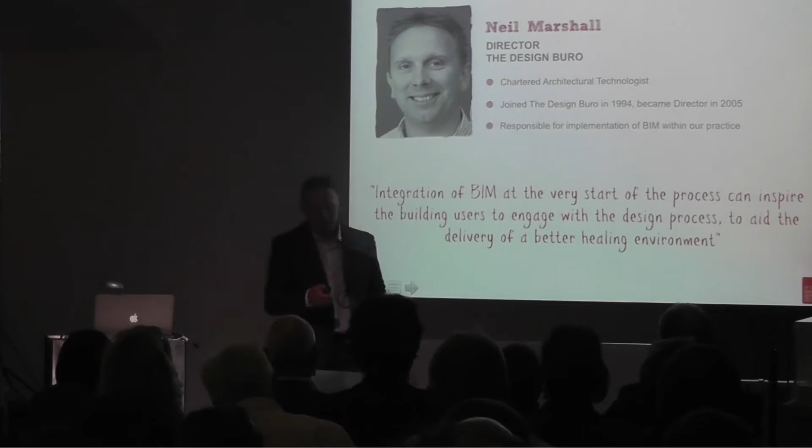So just a quick few pictures about Design Buro, just so you can understand how we've grown over the years. In 1991, there were 7 of us, myself, my wife, who sat down there. As we've grown in size over the years, we've got up to about 40 people, and the other one on the right-hand side is a current picture.

So we've been committed to Vectorworks, Minicad, from the outset. I've been a user of Vectorworks for 20 years now. And the reason we've stuck with Vectorworks over that time is that it's given us the freedom to deliver the buildings that we wanted to deliver. We've also been challenged on a number of occasions by some of the bigger players in the UK. But I can say from my heart that Vectorworks has always delivered for us and delivered the buildings. We've always met the challenges that have been presented to us.

So the philosophy at Design Buro, in terms of architecture, is about the accessibility of our clients - healthcare is our main market. It's about engaging with the users of the buildings from the outset, involving them in the process and giving them choice, planning with them the new facilities that they're commissioning from us, because ultimately at the end of the day, they are the client, they're paying the budget. So that is the ethos at Design Buro.

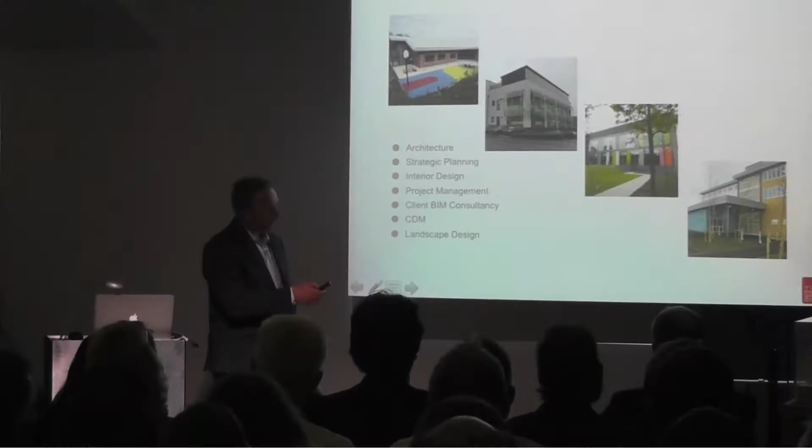So now we're getting to start talking about BIM. It was in 2008 when I first came across the subject, and I was building a community hospital for a large Tier 1 contractor, Laing O'Rourke, in the UK. And at that time, we thought that Laing O'Rourke would be asking for all projects to be done in BIM by 2010. It turned out that wasn't the case.

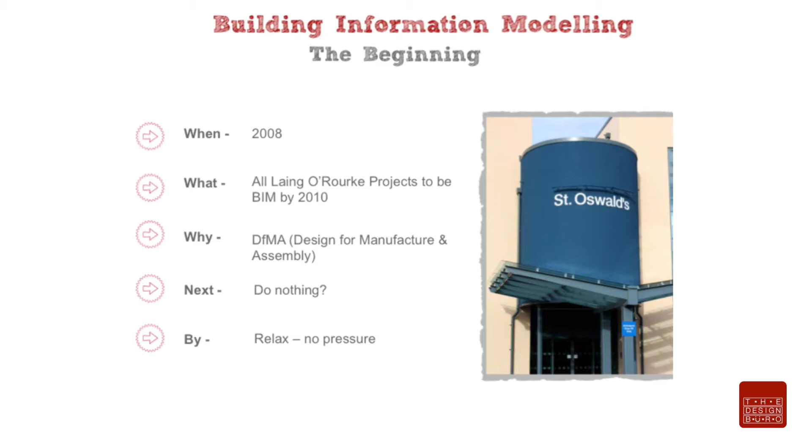We also didn't really understand BIM at that time, and Laing O'Rourke's perception was that it was design for manufacture. So they would obtain the information for their off-site manufacturing from our models.

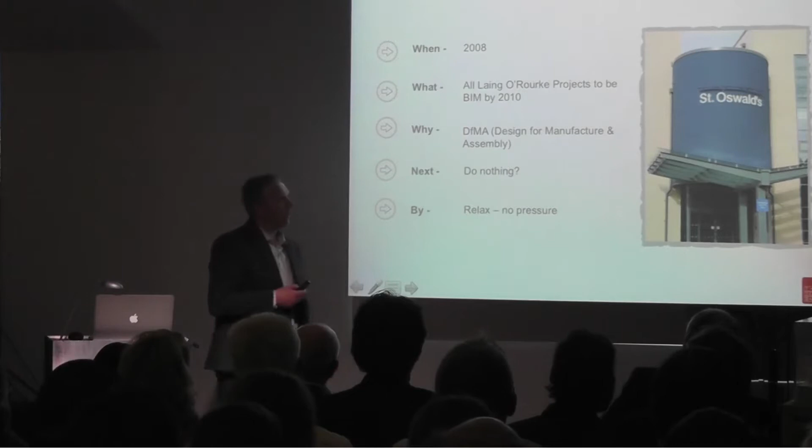Did we do anything from that point on? We didn't. We sat back for a couple of years, and there was no further momentum.

After a couple of years, we started to get more involved in BIM again, and the conversations were happening more frequently in design team meetings. So we thought it was about time we actually sat down, did some reading, and tried to understand it. I can assure you at the beginning there was so much information available to us. It was overwhelming. We didn't know which way to go, and we didn't know what to do.

We did know at this point, however, that the government was mandating BIM on all centrally procured projects by 2016. So we knew there was a deadline, and we had some initial frustrations.

The next thing that happened is we secured a project with Laing O'Rourke to build a pathology building in Glan Clwyd in Wales. On this project, Laing O'Rourke gave us the opportunity to use BIM. They also stipulated that we could fall back to 2D if we needed to. So that was a bit of a lifeline for us on that project.

We decided to jump at the chance because we felt this would be a fantastic education. And looking back now, I realise it was a great education. To actually have deadlines and to actually have something to deliver gave us an immense focus. Since then, we've looked at other areas of BIM and we've trialled various things. But without a deadline, it's very hard to actually have that momentum. So we were lucky in that respect.

We were also lucky that the structural engineer, the mechanical and electrical engineers, and the contractor all bought into the process. So we weren't doing this as architects in isolation, saying look at our great models, look how fantastic we are. Everybody around the design team wanted to be involved. And I think that is another key point - you have to want to, you have to be involved. Anybody who is less passionate will struggle. You need a passion to push forward.

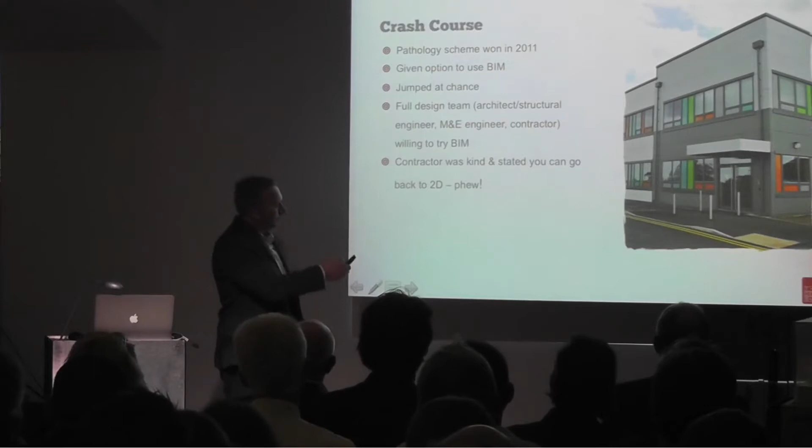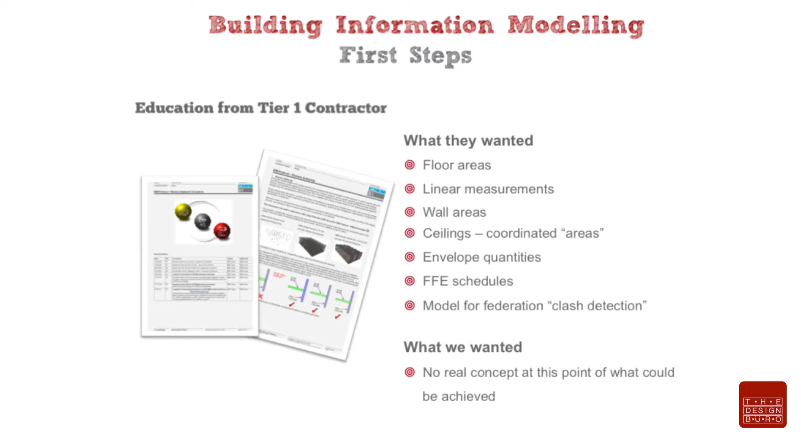One of the first things we did with Laing O'Rourke was go to their offices in Manchester. Myself and a colleague went there for a whole day, and we sat with their BIM manager at that time, who talked us through all of the protocols and standards that Laing O'Rourke use. It was a tough day, but very educational.

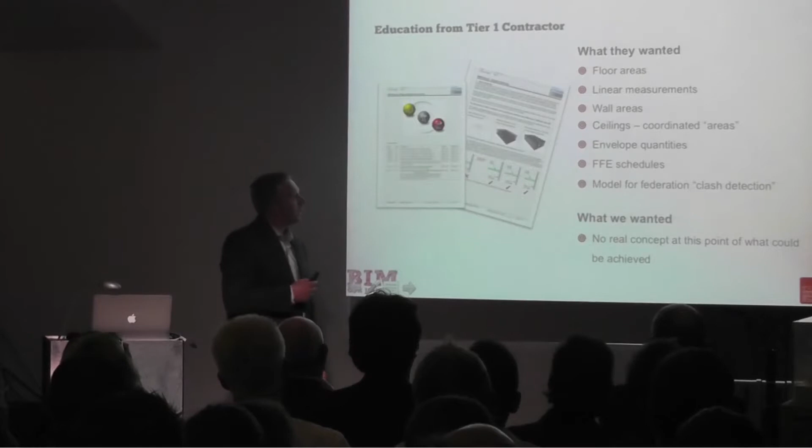We benefited a huge amount from such a large contractor giving a small to medium enterprise that opportunity. We came away from that meeting knowing what they wanted from our model: floor areas, linear measurements, wall areas, ceilings, envelope quantities, FF&E schedules, and a model for clash detection.

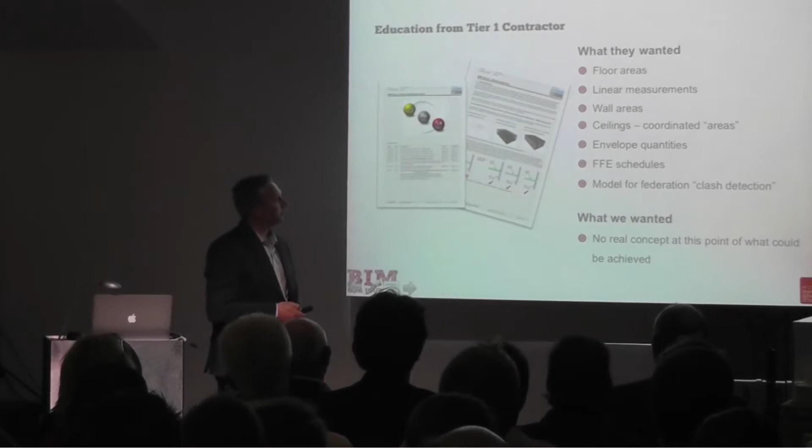We didn't know what we wanted as architects from the model at that point, we only knew what the contractor wanted. We were slightly concerned that we'd signed up to deliver all of that information from BIM. However, they had given us the lifeline that we could drop back.

So we initially set up some training with our equivalent supplier in the UK, which is Computers Unlimited. We upgraded to the architect version because we needed it to deliver the model.

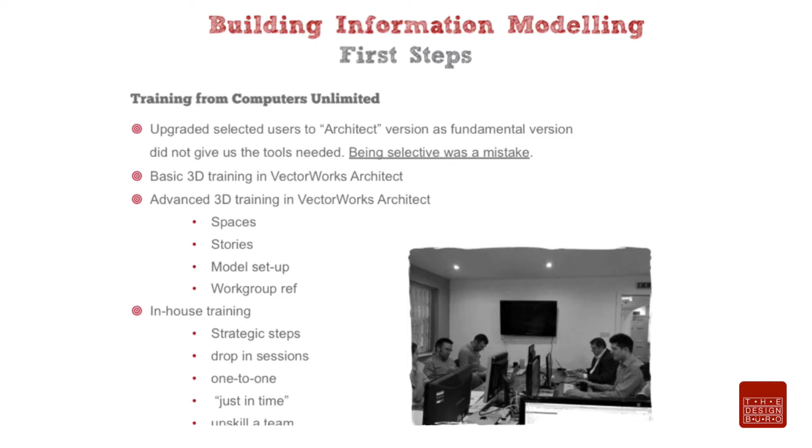Initially we selected a team of people to upgrade their software. We had 29 Vectorworks licenses, and our first batch we upgraded about 10. I think that was a mistake, but I understand why we made it, and we were hesitant in terms of the financial commitment.

But when we started to see what we could get back from those models, and from drawing in a 3D environment, we found the process extremely economical, and it paid for itself very quickly. So that would be the one piece of advice I would pass on.

We had the basic 3D training in Vectorworks Architect with Computers Unlimited, and that was just 3D training, not BIM - how to use the 3D tools in Vectorworks. We learned how to use the spaces, the stories, how to set a model up, and how to work group reference. Really quite basic things at the start, but a foundation to move forward.

We then identified within the practice that we needed an in-house champion, a BIM manager, and we set about looking for individuals who'd shown a keen interest and who could deliver on those roles.

We then sat down, myself and my colleague who we promoted to BIM manager, and put together a document which we called our strategic steps. We drew a simple staircase, identifying each step of what you needed to know in terms of your progression.

We then divided that into columns, identifying the key people who needed to know about 3D modeling, who needed to know about BIM, and later who needed to know about the data, and what the management structure needed to understand in terms of BIM - because they don't need to know how to draw a wall in 3D, but the management structure needs to understand BIM.

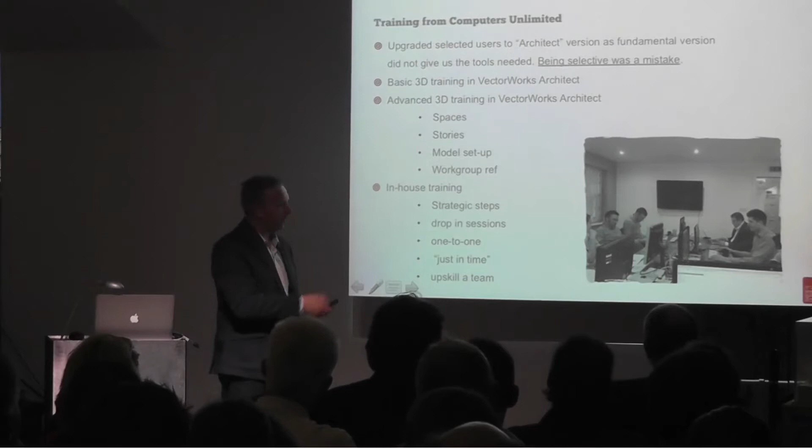So then we got into the actual delivery of our Glan Clwyd project. Of course, we were hesitant about diving straight into 3D. So we were fortunate enough to set up a 2D stream of people, and we had a 3D team as well.

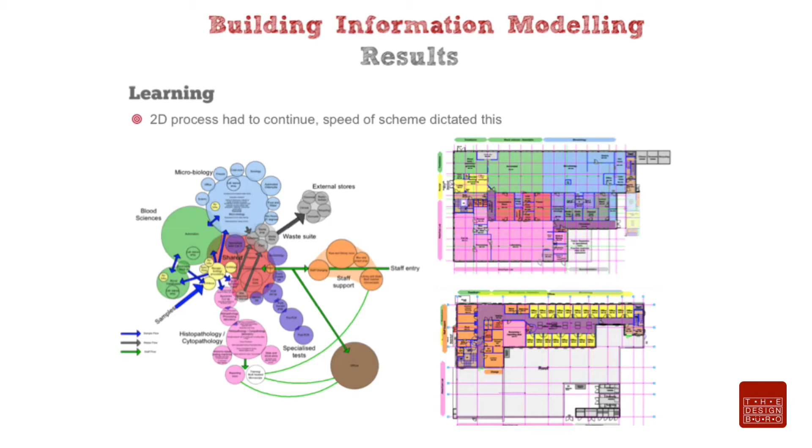These are the two-dimensional drawings initially produced for the space planning, room arrangements and adjacencies - the two-dimensional plans we took into user group meetings to get the original sign-off to the schemes. These are at a 1 to 200 level, relatively early stuff.

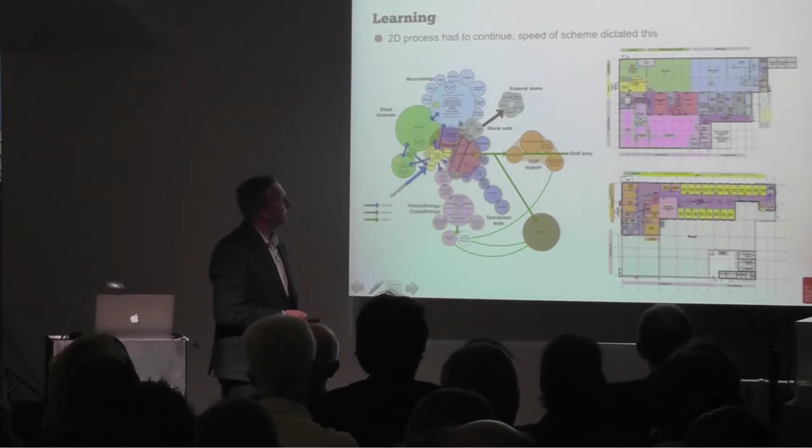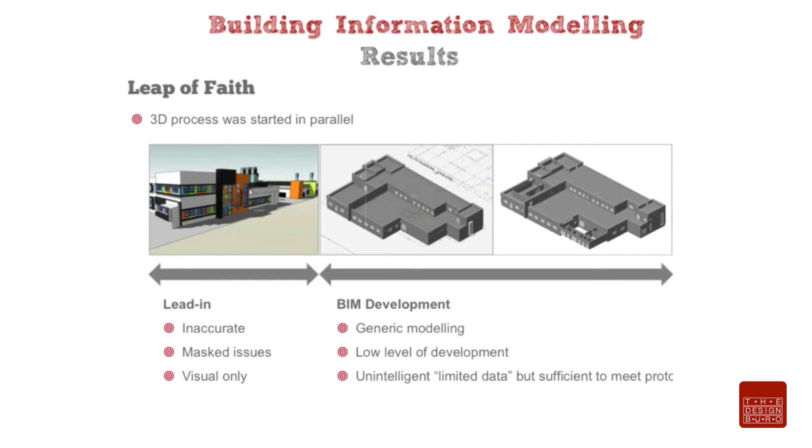Meanwhile, the 3D team was drawing the building in 3D based on the initial strategic arrangement diagrams. The first few models were inaccurate, they masked the issues, and were purely for visual purposes only. But we were starting to get some relatively decent stuff out of the model. We soon understood that the 3D team was overtaking the two-dimensional team in terms of the outputs.

And then we were able to take better drawings to our client meetings and the clinical users. We could show them the clinical rooms in 3D. We got better buy-in from the users, and we got quicker sign-offs. So it was at this point that we realized that the 2D team was struggling

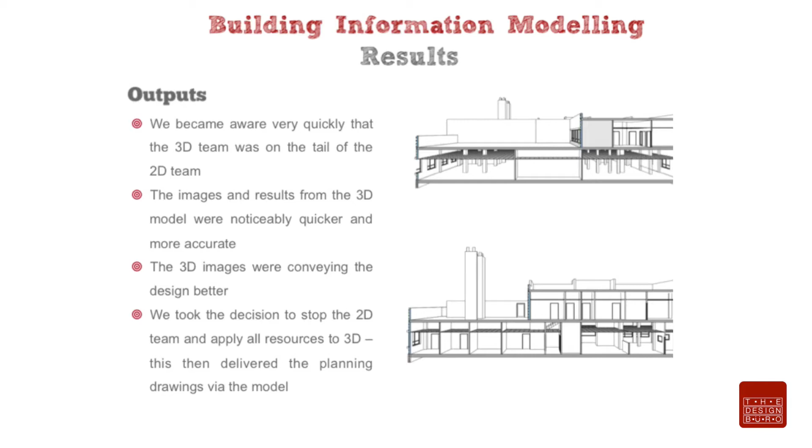to deliver any useful information that we could take to those meetings. So we moved the 2D team into helping the 3D team, and ultimately just jumped in feet first and decided that from that point there was no going back.

So we delivered the planning drawings and the 1 to 200 sign-off information all from the model that we had created, and we did that within the space of about 4 weeks.

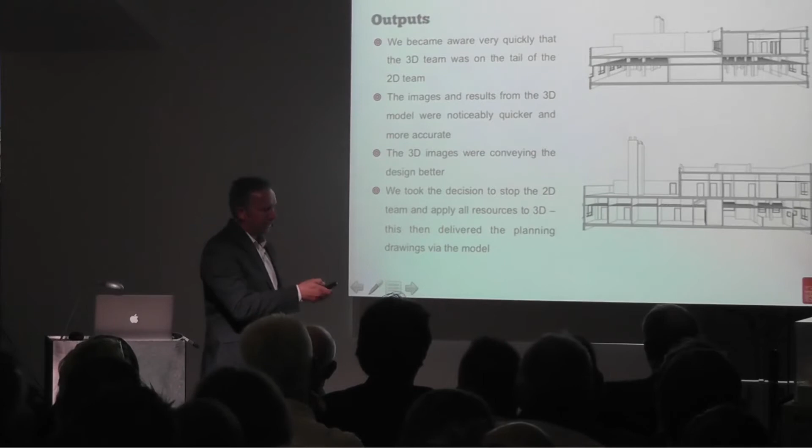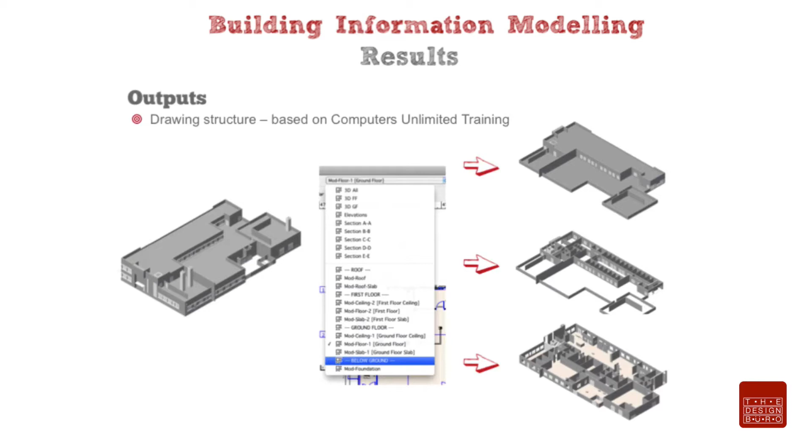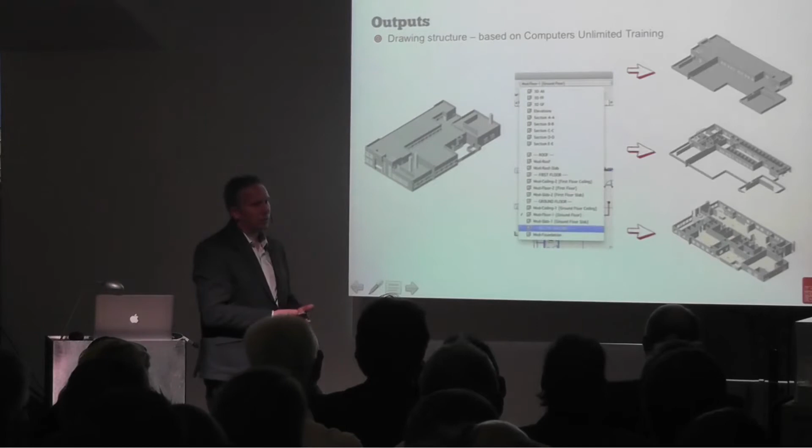We learnt at Computers Unlimited the basic model structure, and we use that for all of our models now, and that sits within our BIM protocol in the practice. That information is relatively available through various websites, but the structure that we learnt at Computers Unlimited was a good foundation, and ultimately we had to convert our 2D workflows into a 3D setup, so our layer structure changed, our sheet structure changed, and our classing structure changed.

We also learnt from this process that we had to have a library of resources. Our 2D workflow never really had a library of components or a library of information to call upon. We just generally drew it from scratch each time. But we understood the benefits of the reuse of this information through the model.

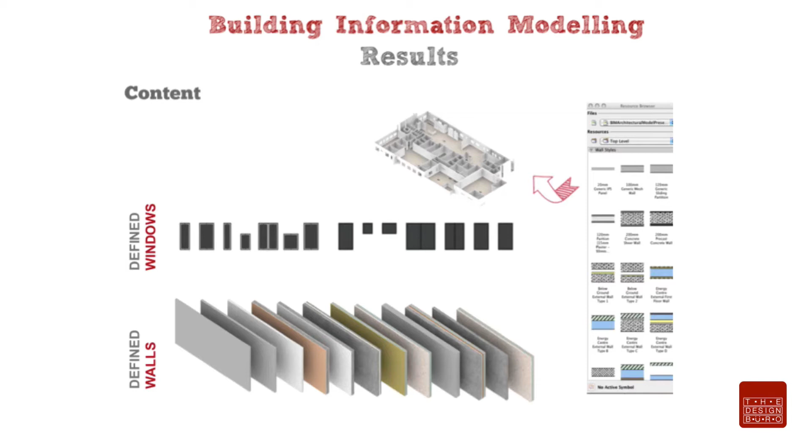So we had a couple of individuals within the practice sit down and go through every wall type, every floor type, every ceiling type they could conceivably think of. We structured that information within our Vectorworks environment, and then we used that to deliver the construction drawings for the project. And ultimately, we did the same for windows, doors, furniture, and so forth.

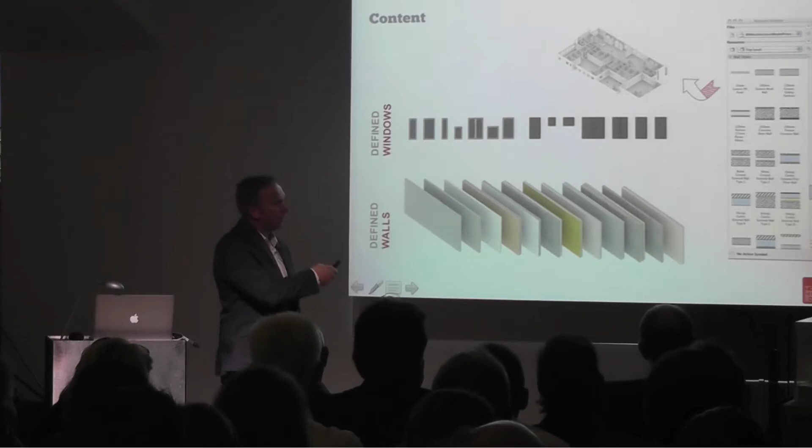That then gave us the schedules and the information that Laing O'Rourke was asking for at the outset through their BIM protocol.

So a little bit more information about why we've continued with BIM. As I mentioned earlier, the government mandate is to deliver all government procured buildings in BIM by 2016. We are in some way lucky that the government has been really prominent in terms of what they've put together for BIM with their task groups, with their website, with the documentation that they've put together.

It's been a huge help in terms of convincing the clients and the smaller contractors that we work with that there's a real necessary need to move forward with BIM.

You can download this information from the UK websites. There are 4 Pathfinder projects that have got a huge amount of data and information on there that demonstrates the advantages of using BIM through a project workflow and the life cycle of the building.

I've mentioned the government's documents, and there are 7 documents that the government have put together that identify what's needed within the model and within the BIM protocols to deliver that information. They've also set up a series of regional hubs, of which I'm a core member of the West Midlands Regional Hub, where we meet once every 3 months, have a cup of coffee or tea, and basically talk about the problems and share information.

Some of the reasons the government have done this is that they've looked forward in the UK to 2025, and they've delivered a government strategic objective document. In that document, it talks about BIM in about 3 places. It doesn't feature massively in the document, but it's the clear driver for delivery of BIM in the UK.

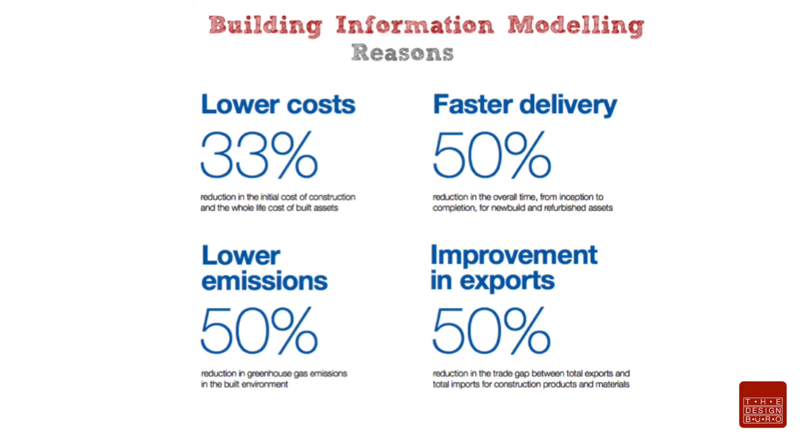Another factor the government has looked for is export. The government wants to export our BIM knowledge and talent to the rest of the world, so they've seen a business objective there. By upskilling their workforce, they think they can go out to the rest of the world and sell that. We are starting to see that now with some of the larger contractors winning more work abroad, and they could attribute it to BIM.

I've talked about the 2025 vision. You can download that from the government website. It's a good read, it tells you the reasons behind it and talks about lots of factors involved, and it comes back to cooperation, coordination, people, and leadership.

They talk about the integrated project delivery cycle in the PAS 1192 documents, the naming structures, the naming conventions, the digital plan of work - how much information should be in your digital model at what stage of your project life cycle. It's clear, it's prescriptive, and we should all be working to this in the UK. So it doesn't matter whether you're M&E, architecture, contractor, or who you work for, it's a common source of information.

A couple of things still outstanding are Uniclass, which is the classification of construction components. That's currently gone out to tender for delivery from one of the major BRE or the NBS in the UK.

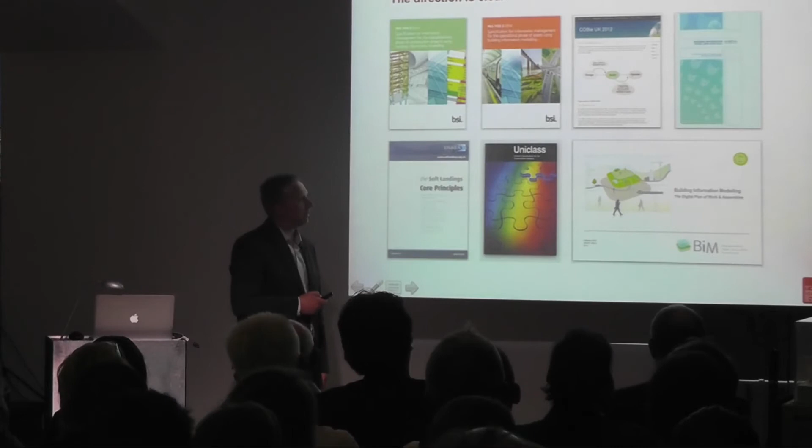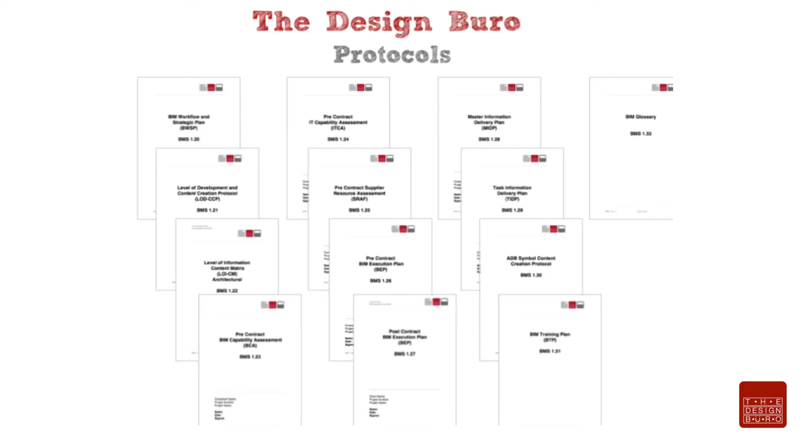So what we did at Design Buro is we sat back from this. We looked at our current business management system, our current protocols in terms of Vectorworks, and we thought, what do we need to do to make our business ready for 2016? That culminated in the production of all of these documents, which are all versions of a government document - they either come from something in BS 1192 or PAS 1192. But it sets a structure up for the employees within our practice to understand how this information is put together and to document what they do.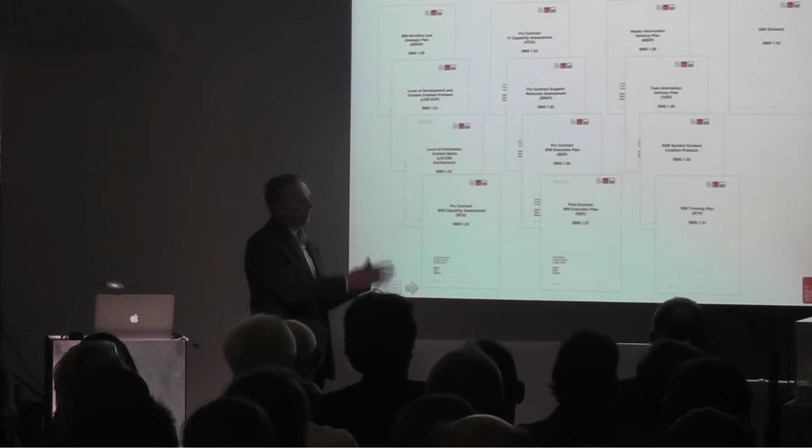Because along with BIM, you need all the paper documentation. You need to agree with the team what you're going to produce and when you're going to produce it, and you need to honour your promises. So this suite of documents sets out at the outset what, when, why, and how.

So if we go back to BIM now, we've talked about our strategic steps, drop-in sessions, one-to-one training, and just-in-time training. One of the things I learned by going through that process is the training can take many forms, and you can't just train people with one method - everybody learns in a different way. Our practice has technologists, interior designers, managers, job winners, architectural assistants, and they all have different needs, so it's about tailoring that information to suit the individual.

So we go back to pathology now, and we've got the information that we ended up with at 2D. We've got our 3D basic model, which gives our client a better understanding of the building in three-dimensional form. Our client being the NHS, we deal with the clinicians, and they're on the front line - they deal with people that are poorly. They don't understand drawings, but they understand 3D drawings, so that gets better buy-in.

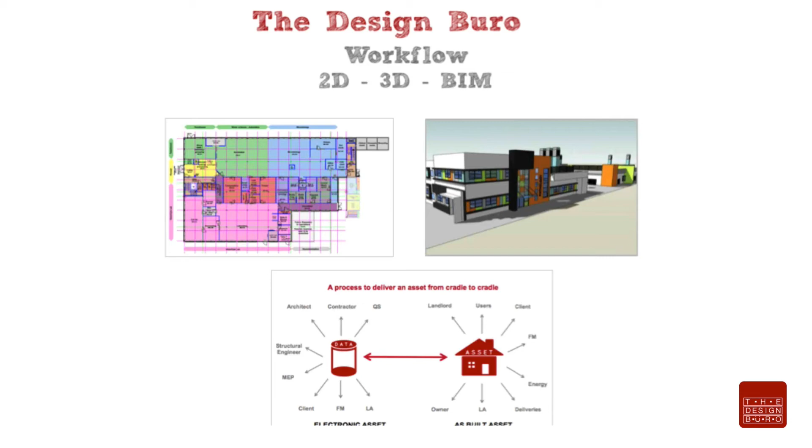So a small diagram at the bottom there to try and understand what we're trying to do and how we're trying to promote it. We've got an electronic asset and we've got an as-built asset. Those two items need to communicate with one another to make sure that we deliver this life cycle information for the building.

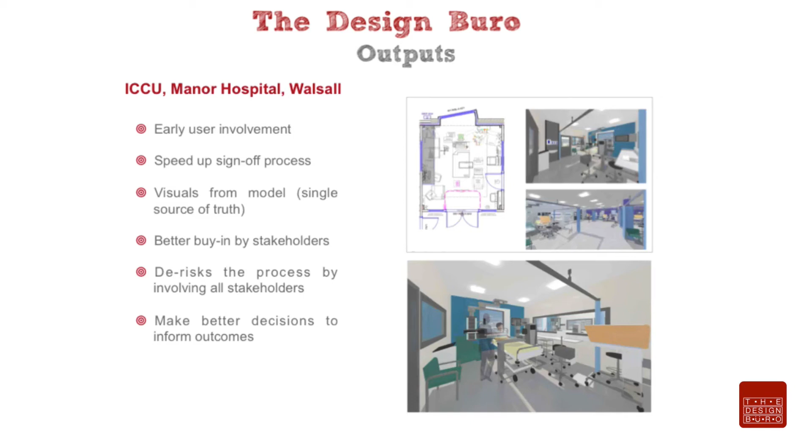So here's a couple of other slides on the advantages that we get from BIM and some of the drawings that we can take into our user meetings. We can get this information quite quickly now we've got our library of components. So earlier user involvement, at 1 to 200 level or at room data sheet level, we can take in a relatively quick model that we can produce to the clinicians and show them what their room is going to look like. We can take our laptops and projectors and modify these in that meeting, should we choose to.

Live demonstrations are always scary, but the opportunity is there to do this in a live environment.

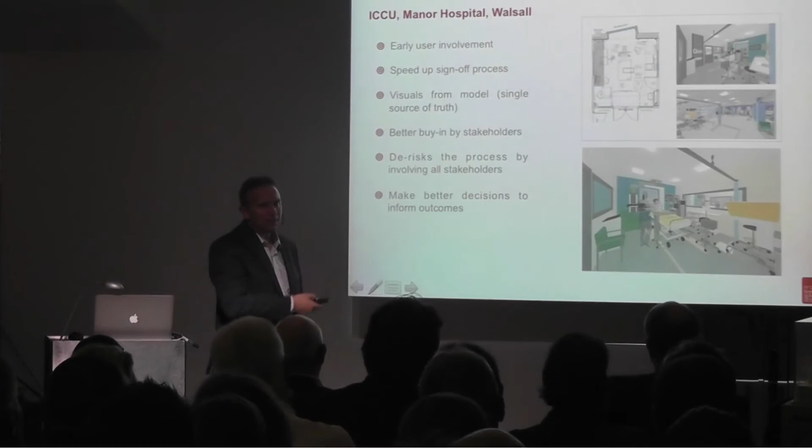So we speed up the design process, we get better visuals, we get better buy-in from the stakeholders, so people are less likely to change their mind if they've seen this. If, for example, we give the clinician a two-dimensional plan, they might be embarrassed to say they don't understand it and sign it off. But we know that if they find something wrong later on, we'll be expected to change it. And there's a history of that happening within how we've delivered buildings in 2D. If we show them the 3D visuals, they understand it and they're more happy to engage with you on a level that they understand as a clinician and you understand as an architect or a technologist. So hopefully it makes better decisions. We get better buildings, we get better hospitals and better healing environments.

So this is a project that I completed in around about May. We had handover in May. From this model we had all of our schedules, all of our three-dimensional views, and we had our user engagement. And for me, one of the key strap lines for BIM is a single source of truth. In the past, the contractor will cherry pick which document they want to use. If you have 3 documents and they're all different, they'll cherry pick the cheapest document. And so at least with BIM, if it's wrong, it's wrong in every document. There's no opportunity for them to decide which document they want to pick or which one they want to say they priced. You've got a clear fact. It's a single source of truth. So that eliminates some of those discussions that have gone on in the past.

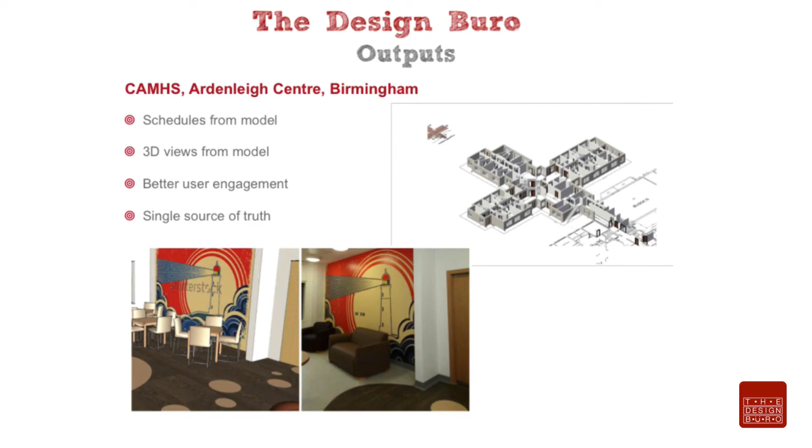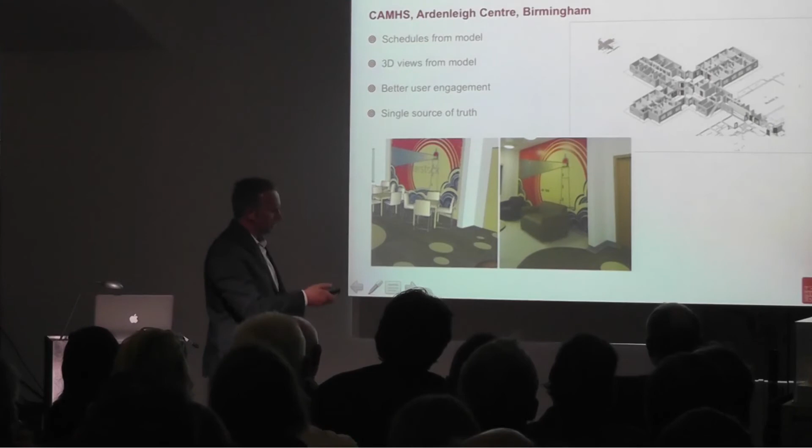And the bottom 2 pictures there are the virtual picture that we used to explain to the client what they were getting. And these were children. This is a CAMHS unit, so this is for children with mental health problems that have done some really horrible things. They were part of the user engagement. They used the process of building this building to help them heal. So we sat down with these individuals who were challenging, and we went through various different options with them, and ultimately what we delivered electronically is on the left, and what we delivered on the right there is the actual constructed building. I think that's a great way of demonstrating client buy-in.

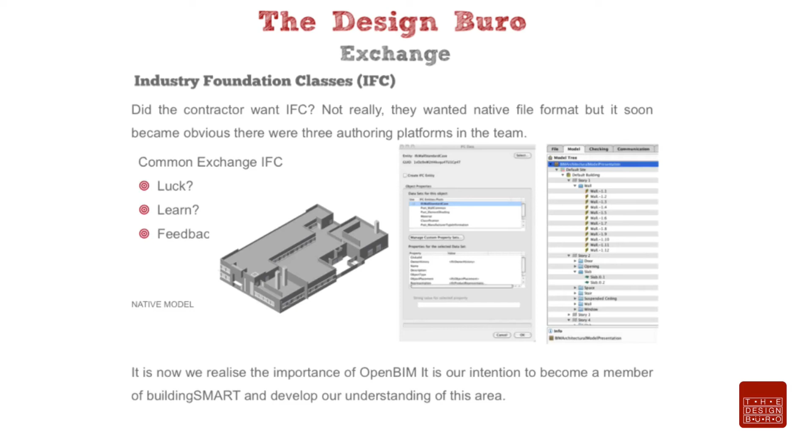So in terms of the model then and exchanging the model, we've been challenged in the UK by the main contractors who want the native model. They always ask for the native model. Well, the native CAD model, from my point of view, is useless to them. It's useless to the client. It's useless to anyone because there might be 60 stakeholders in the delivery of a building. If you looked at all of the subcontractors, the native model at every one of those is a different native model. So we've got this universal language, which is IFC, and I'm a firm believer of Open BIM, a firm believer that we need to exchange models in a format that people can read now and people will be able to read in the future. Because we need this data to have a long life. If we're going to meet the targets that the government has asked for, it needs to have a life as long as the building. And for us, it's IFC.

So we were challenged by Laing O'Rourke for a native model, but we demonstrated through some exchanged early models that the IFC information that we were producing from Vectorworks delivered what the contractor wanted. And I would advise anybody that's going into this, at the outset, exchange a basic model. A couple of hours work, just put something together, a basic box, a window and a door, export it as IFC, send it to all of the people that are engaged in the team and make sure they can read that information. And they will be able to read it. Get some feedback from them, find out what's missing, and if they want more data, that's your opportunity to input into your execution plan and agree what you're going to provide. And ultimately, by doing that, you'll get better outputs, you'll get better involvement later on.

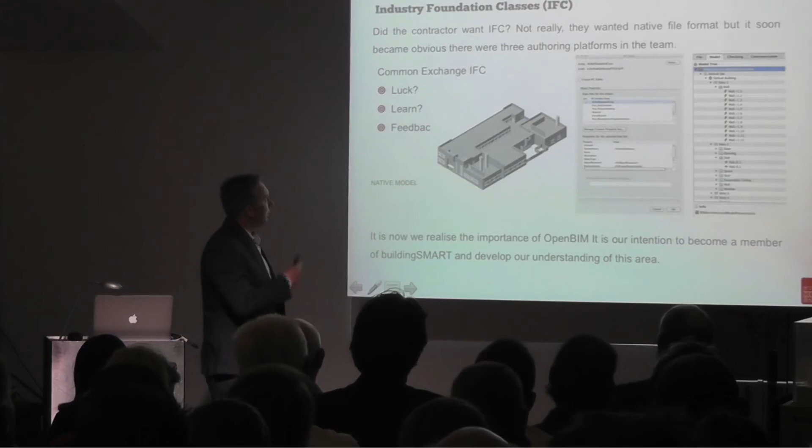Our initial entrance into IFC was blind. It was pure luck. We didn't know what it was or what it was doing, we just knew we had to do it that way. But what we've since learnt is that the basic tools within Vectorworks give you a very good IFC output, and we've learnt to modify existing components rather than generate new ones. That gives a better output. The first time around we were lucky modifying existing walls and components. We fed that information into the team and back to Vectorworks, and we've moved forward with it.

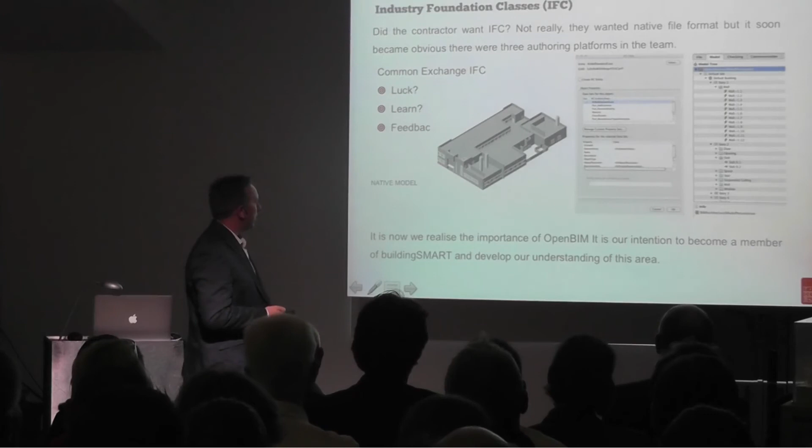We will continue to move forward with Open BIM, and one of my passions now is to get more involved with Building Smart.

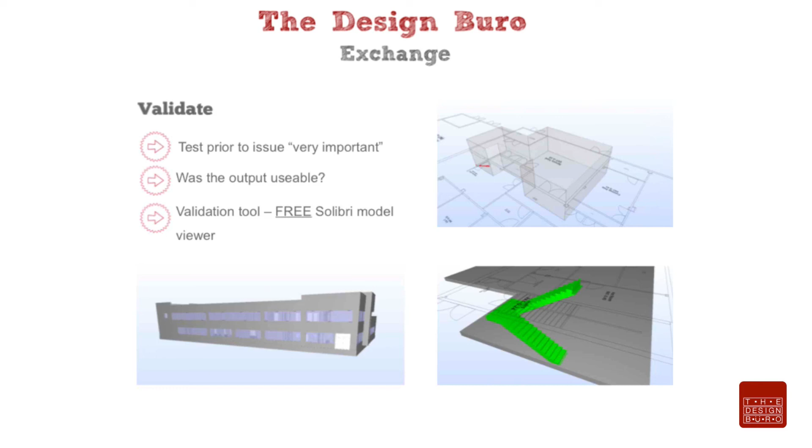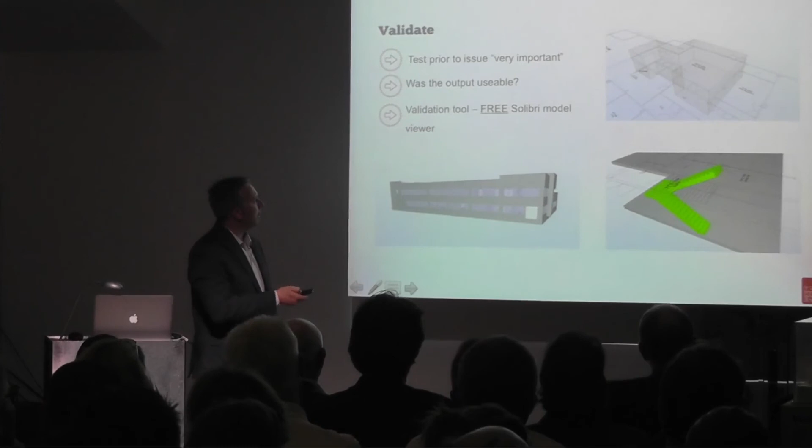You've had a presentation already on Solibri today, but it's very important to test the information before it leaves your practice, and you need to validate what's going out. The way we did that when we first started was to download the Solibri model viewer - it's free. You can import your IFC model, do a visual check, and do visual clash detections for free. It paid off for us because there were certain things that went slightly wrong - these were a few images from our Vectorworks 3D model that we were able to look at for free in Solibri and identify whether we were sending out quality data to the contractor.

The contractor federated the model using Navisworks - architectural, structural, MEP. We had fortnightly design team meetings where we sat around the table, doing this on a big projector, just in this format. We looked at the clashes and the information, took that away from the meetings, rectified the model, shared them again, and the process went forward.

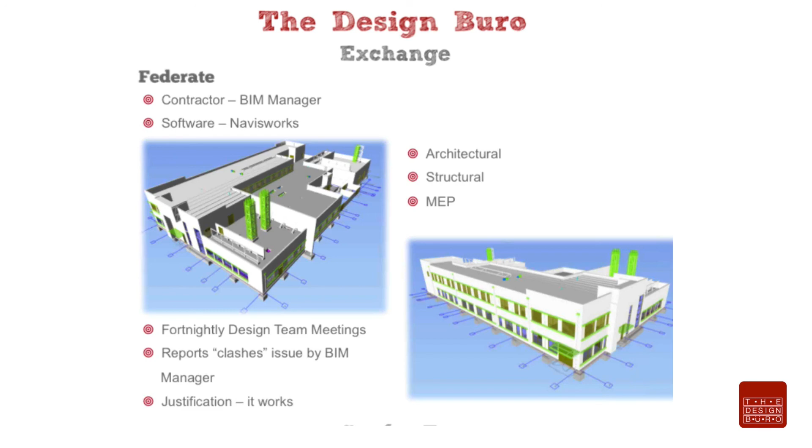And the justification of that - it works. Doing this clash detection in 3 dimensions on a projector in a live environment with the stakeholders around the table is the best way to do it. It really works. There's no more 2-dimensional drawings over the top of each other. Everybody buys into the 3D.

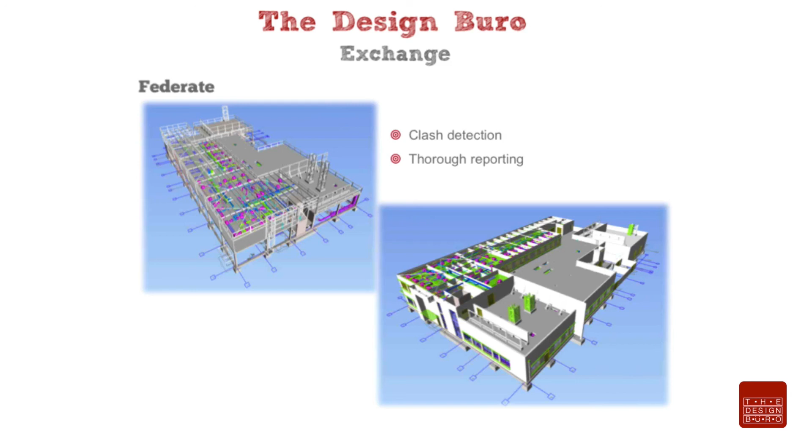A couple of visuals there of the various models federated together in Navisworks.

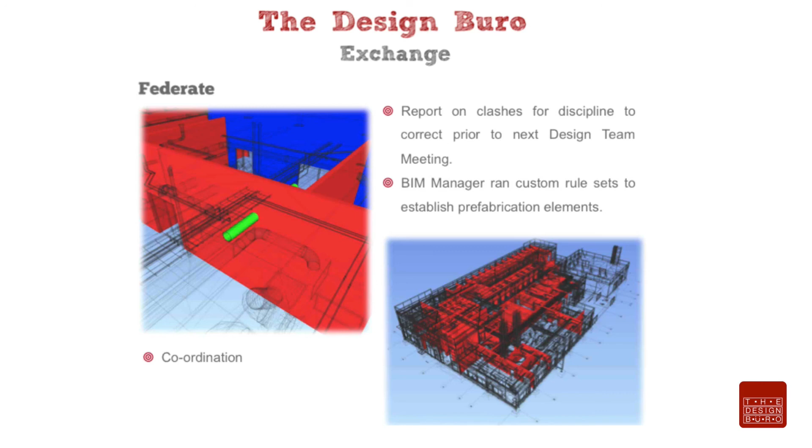So here's an example of a clash that was identified during one of the design team meetings. That was reported - we ran custom rule sets. At this point, this is when we started to establish the prefabrication elements of our model. Laing O'Rourke looked at our model and what they could prefabricate off-site, because off-site prefabrication is cheaper. It's much better for health and safety, and it means the build on-site is quicker, which means that's cheaper too. So the government's message is being reinforced.

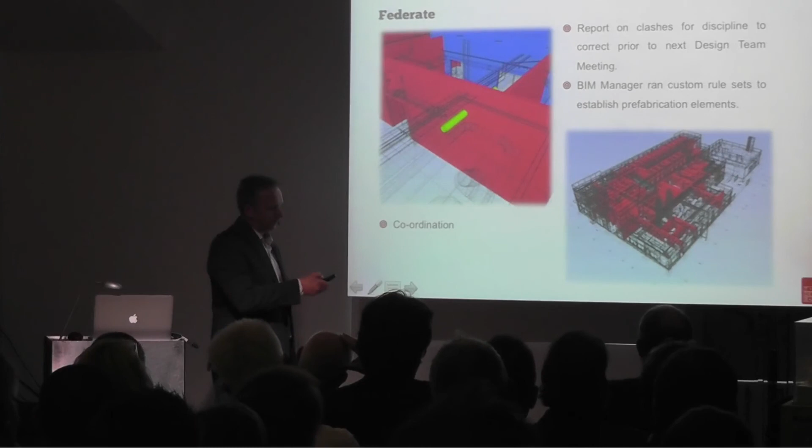2013 was about learning and education. 2014 for us now is about implementation. We've delivered our suite of documents within the practice and told everybody to deliver the models using this format. Give people some time to practice and time for a mind shift - they need to understand how the workflow is different in 2D versus 3D. People are used to having a way of doing things that just gets done, and they want to stick with that. But you have to demonstrate there is another alternative, and by demonstrating it you show that alternative can be quicker. Then they start to get it and get on board.

I know we've got things wrong, but you have to capture the mistakes. You can't come back at the end of the project and do a post-project evaluation - it's capturing the mistakes as they happen. Don't delay that, don't put it off to the next week or month because you'll forget. So that's one of the important messages to pass on.

Don't think that's it - I don't know whether there was another slide, but it must be the end. So hopefully that was helpful.